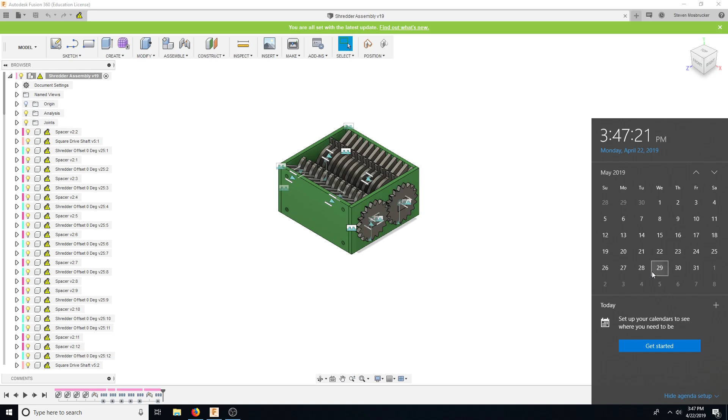And then option number 5 is this space here that I found. It's called this chat thing, let me close this chat. Okay, so this is called the Custom Space, and they have a place in San Jose.

Basically it's a giant warehouse that you could go in and lease a space. They have locations throughout the United States. It's subdivided with walls into different spaces, and you can lease a space and operate your business of light manufacturing in that space 24/7.

They give you a card key, and you go into the space and operate out of it. If you expand your business and bring on an extra person or two and need more space for more machines, you could get a bigger subdivision and keep going. As you see here, it goes from 200 to 20,000 square feet.

For the 200 square feet, I was quoted about $318, and that's all included—electricity, everything. All by myself, if I leave, the shop doesn't go under. If somebody else leaves, this place doesn't go under either, so I don't have to worry about the same thing happening like at the current shop I'm in.

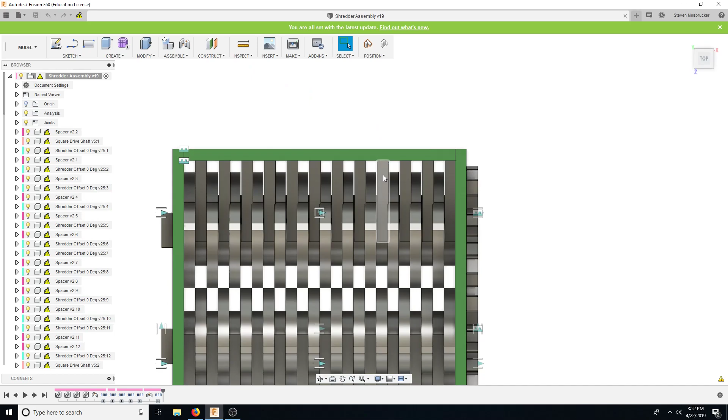So what is my plan, my quote-unquote business plan? As you guys know, I was building my water jet to basically cut out these shredder guys. So I have 3 projects, 4 counting the multi-shooter: the multi-shooter, the shredder project, filament maker, and 3D printer.

I'll probably eventually do the multi-shooter open source, and just do periodic updates on it, then mainly develop the fill factory and make it better after multiple continuous updates. So my main moneymaker starting out is probably going to be this guy, because for all those options, I'm buying my own machinery, and I plan on running those machines continuously.

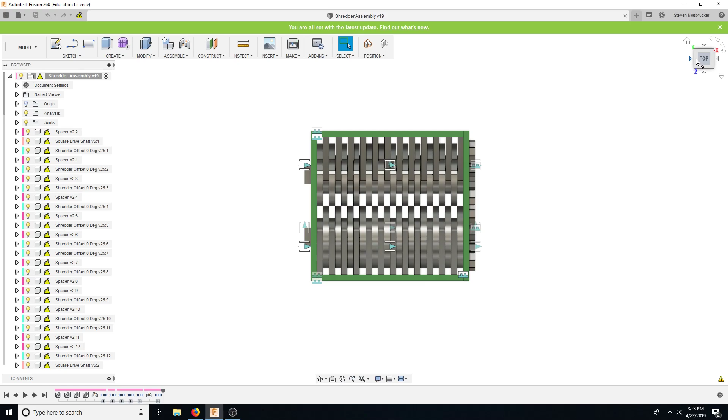There's very little hand tools involved, it's mainly CNC machines, so while that's running I could do something else. While one machine's running I set up the second, that one runs and I set up the third, and when I start the third I go back and take the first part off, load another part in, etc. It's basically a production, not like I make 2 or 3 parts and then do a whole bunch of hand assembly. The idea for all these products is that very little hand assembly is required.

So I came up with a really good idea on how to lower the assembly and cost for this guy. As you guys know, I struggled to get the cost down to where it's useful for the reclaimer, which is my 6-inch by 6-inch by 3.5-inch tall shredder.

Another idea that I had, which I'm probably going to use now because it also drops down my assembly time and cost, since it's just going to be myself, and also drops machine cost. It'll probably not drop, it'll drop a little, it'll increase quite a bit, but it's way more — I could do way different types of products on it than the water jet.

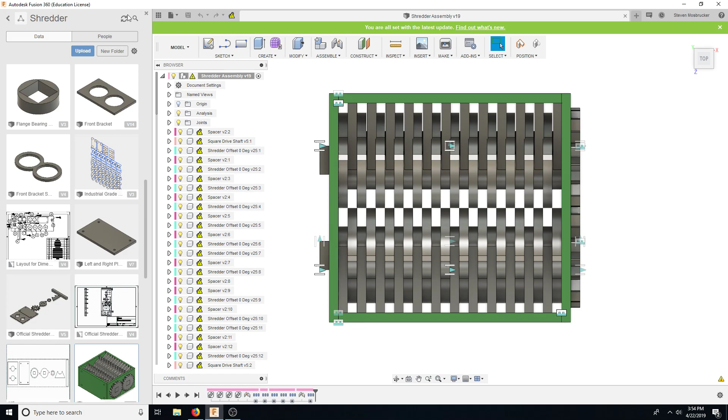Basically, my idea now is to buy a CNC mill and use the 4th axis to cut this assembly all in one piece. So basically what it would look like is without this frame here — let me bring this out — is basically to load this into the 4th axis.

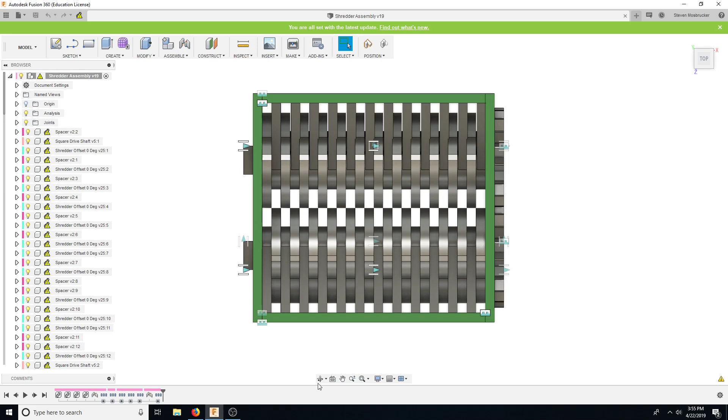So I buy a big cylinder of 1045 steel, basically this big, and when I buy that piece of 1045 or 1055 or whatever steel, I put it inside the 4th axis, and I go in with an end mill and basically cut all of this geometry out in one piece.

That way there's no square here, so this assembly is extremely stronger, a whole bunch stronger, and it's already in one piece so I don't have to go in later and assemble this. A big thing with a water jet is the tolerances of that center square — even on a very expensive $150,000 water jet with a tilt head and Omax, it still didn't have good tolerances, so on like 5 or 6 of these shredder dials, I had to go in and file them out in order to get them to fit on my ground square bar.

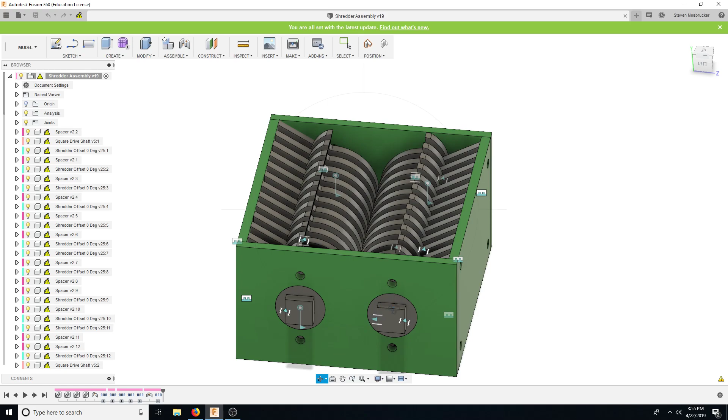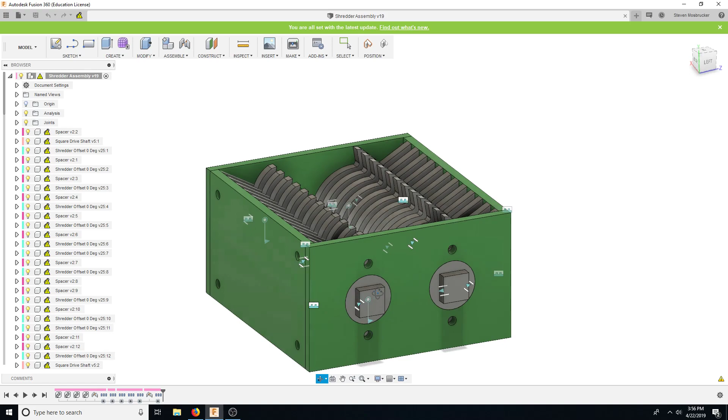So with this, it's all machined in one piece. This whole shaft is machined, and then I don't have to worry about machining these pieces because it will go right through the bearing. The bearing will come out, the bearing will be here, and this guy will just come right in. This shaft is way thicker, and I'm not going to have to worry about these little narrow weak spots here, so this shaft will be thicker — you could shred more thicker stuff.

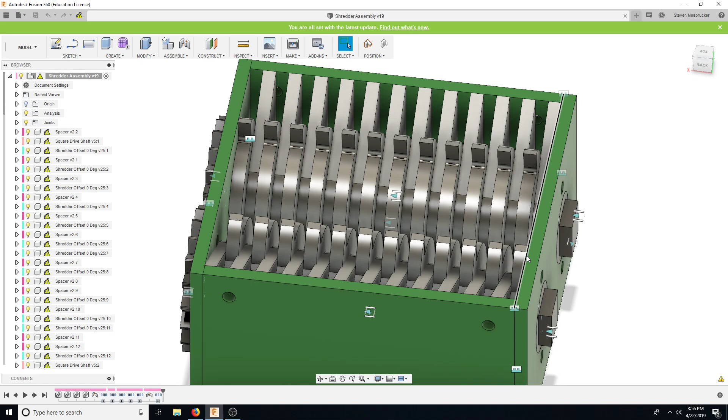It's more robust, and once I take it off the mill, it will basically be ready to put in. But obviously you lose something there — you can no longer take the machine apart and clean the blades, because once I weld this thing shut, you can no longer get it out. So I might actually bolt it shut now, so that way you could disassemble it and clean the blades out if you need to do so. So that's kind of the idea, and these will be made on the mill.

Everything here will be made on the mill. And these guys also, actually now these guys might be a problem. These will be done easy.

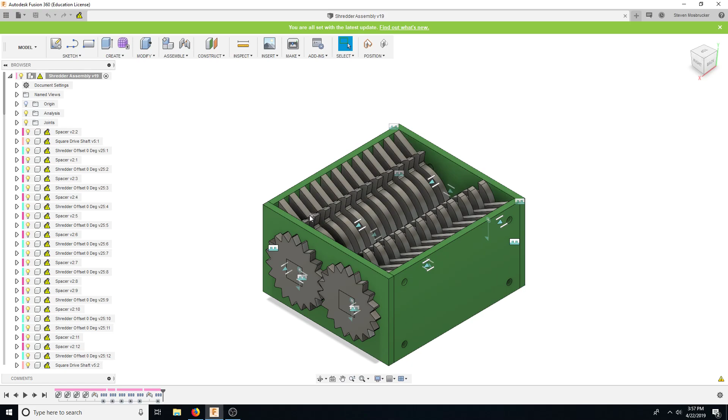Oh, but these I could figure out a way of stacking a whole bunch of these quarter inch pieces on top of each other, and then just do a big profile out of it. So that's an option, is to drill a hole or something and then stack them and put a bolt through all of them. Or these aren't even that big of a deal, so these could even be plasma cut or something. So I need to figure out how I'm going to do these, because that's another thing.

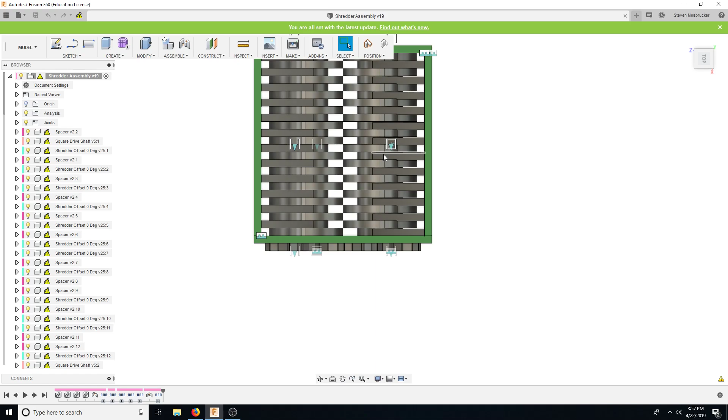But these are all the same shape, while the blades, if you guys remember, are all indexed 15 degrees. So, and then also I'll cut these guys, these teeth here, the gears on the mill as well.

So this is the mill I'm planning on getting. It's from a company called Skyfire CNC. They're based in China. They are basically a little bit of a higher grade Tormach. So Tormach is now kind of moving with their MX series and their M series. They're kind of moving towards what Skyfire is.

So if you guys don't know Tormach, Tormach's a really nice machine. I've used them for many, many years now at the shop. But basically they're a glorified manual mill conversion, because they still use dovetail ways. So they move along these dovetail ways, and that kind of doesn't really have as good, it has a lot of rigidity, but it doesn't have a lot of precision. While these guys use very, very big linear rails, which are what the really big professional CNC machines use.

So what I'm thinking of doing is, actually I just got a letter in that's kind of unique, is a way of financing through PayPal, getting a PayPal business loan, and then being able to buy one of these machines.

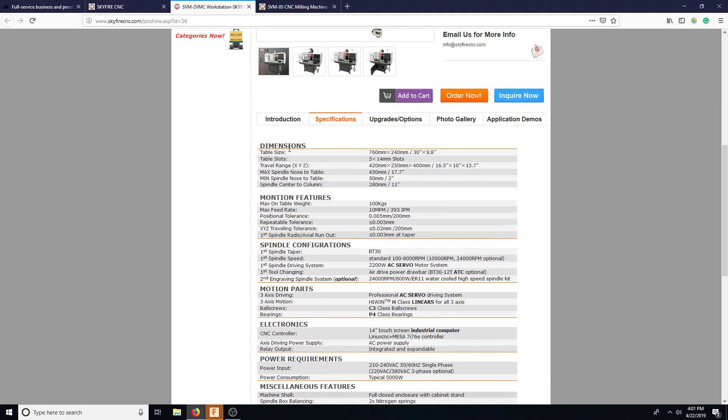So there's a reseller here called Triple Tree, which is a reseller inside the United States for these machines, Skyfire machines. And these machines, they come with the ATC, which you can see right there. There's the ATC, automatic tool changer, 12-piece or 8-piece. Then it has a finish light, and then there's the big spindle, the heavy-duty brushless spindle up there at the top. I think this one's the even bigger spindle.

Yeah, this is the big guy. It's got a big old motor up there. And then this is the drawbar, I'm going to assume.

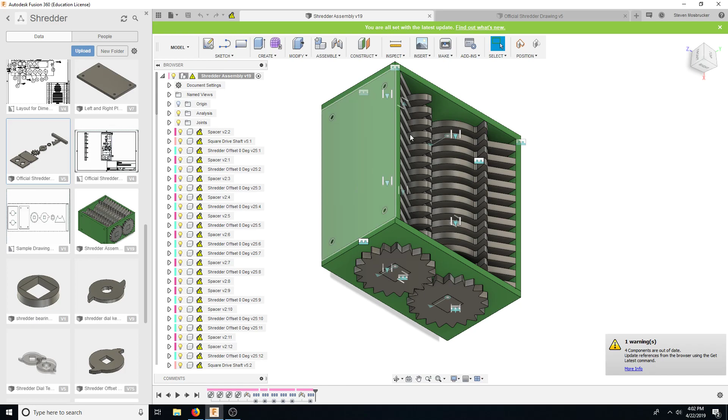Okay, so that is basically what I'm looking at doing. That covers the shredder stuff, so I'll use something like that to create the shredder. Not sure what I'm going to use to create these half moons, but I'll probably just do that on the mill as well.

All right, so on the FilaFactory - you'll see more about that when we conclude the thing for senior project. Basically it uses 3D printers, which I'd want to build, called a White Knight, which is a belt-driven infinite Z so you could just print on forever. I'll probably run something like that to print out these dimensional control modules - print out the hopper, the housing, brackets and stuff, and spool and drive cones, and the winder module.

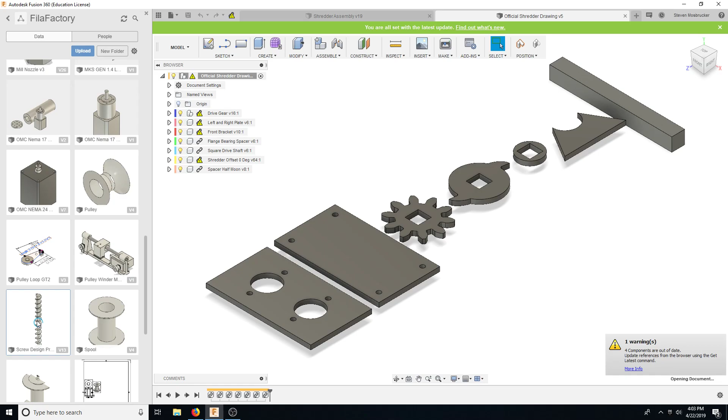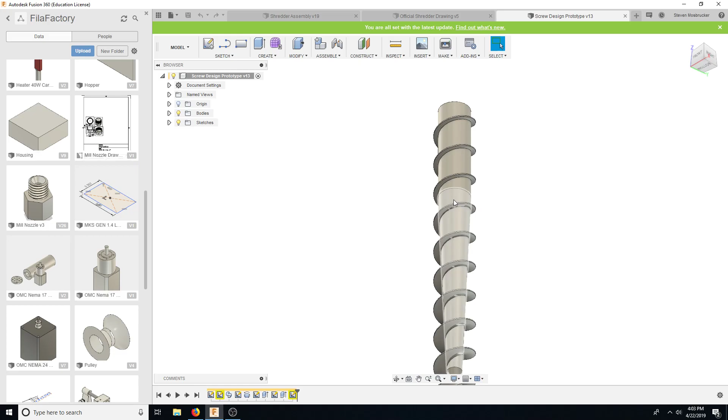And then on the mill, I'll use that guy with the 4th axis to do my screw. So here is basically the design of my screw. I've been looking at the 4th axis here, so this is kind of what the screw looks like. Here's where I put my pulley, and you can see it has a 3-to-1 compression ratio, and this is big enough to fit pellets or recycled stuff in here. It compresses as it goes and builds up a lot of friction along the sidewall, then extrudes it out.

So with the mill, basically what I'm going to need in the shop is a horizontal bandsaw, CNC mill that can handle a 4th axis - so bandsaw, mill, lathe. I need either a manual or a CNC lathe, and I need an Infinite Z 3D printer. And obviously I need something to make filament really cheap, so I'll use my FilaFactory design.

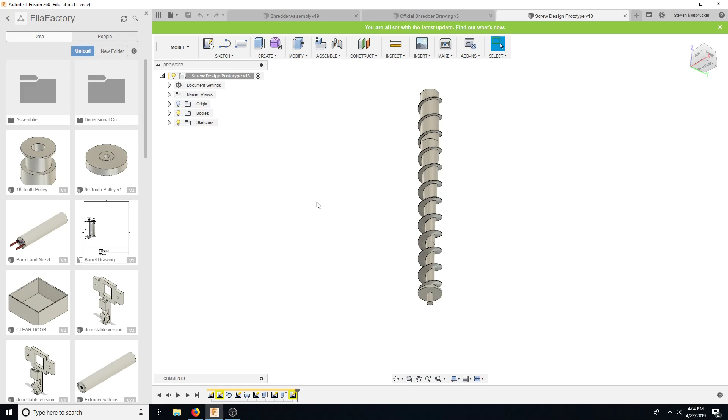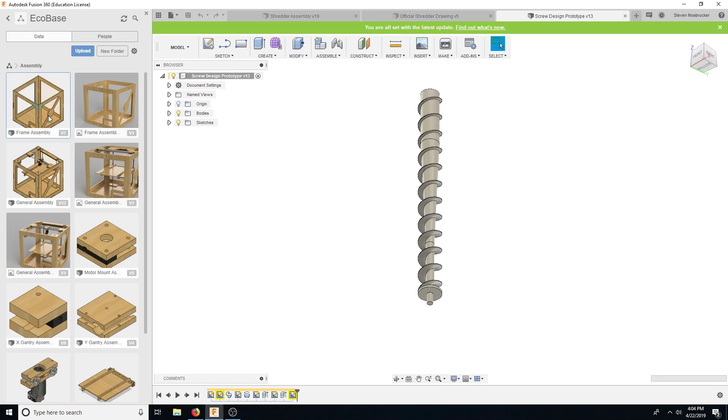And finally, the last thing would be my EcoBase 3D printer - there it is. So the last thing would be the EcoBase 3D printer. Obviously need a laser of some type, so hopefully I'll just go for the small laser, and then probably some sort of panel saw - buy a cheap one from Harbor Freight or something to cut them out. Or I could cut them out right now at school at the university, and then I'm good to go there.

So those are the 3 projects. And then coming up here is Maker Faire - I have not yet been confirmed. Actually, they're struggling to find a place for mine, so I may or may not go. I'm actually free to go because on the 16th I'm done with all my classes, and the event is on the 18th and 19th. That would be nice, but obviously I can't do a lot of pre-preparation because I'll basically be studying to make sure that I do indeed pass all my classes.

So it'll kind of be a last minute thing. I'll show the FilaFactory stuff that I finished, which I think would be pretty cool, and also I did a little bit of work on the frame for the EcoBase. Then I'll show my finished shredder that I've welded together, and have that guy spitting out some plastic. So hopefully that is what I have finished for the show, if I get into the show. We'll have to see on that.

All right, so this is basically it for the update. April 22nd, 2019, graduating within 24 days. Basically getting ready to start getting into manufacturing, at least part-time, now a third of the time - before it was like a fourth of the time. And then I have stuff at home, so it was school, work, stuff at home, and then doing this stuff. Most of the time I was doing stuff for school for senior project - I wasn't able to go back and forth between the different projects. So that is the idea.